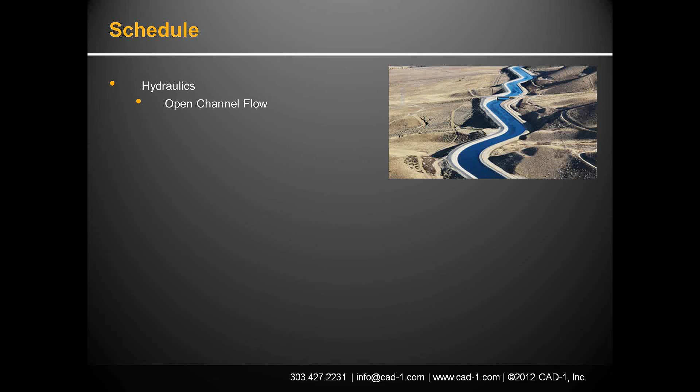So what hydraulics are we going to be talking about? We're going to talk about some open channel flow - so I've got a ditch, how do I know how much water is flowing through it? We're also going to get into creating stage and storage curves - so I've got a pond at this elevation, how much storage do I have in my pond? Another thing I'm going to show is how to take a channel and export it out to HEC-RAS. Now, I'm not going to actually do a HEC-RAS analysis, but I'll show you how to get your data out of Civil 3D and into HEC-RAS so you can start running these different types of analyses.

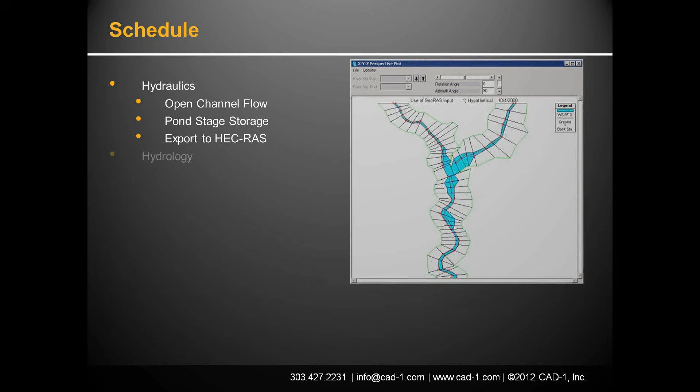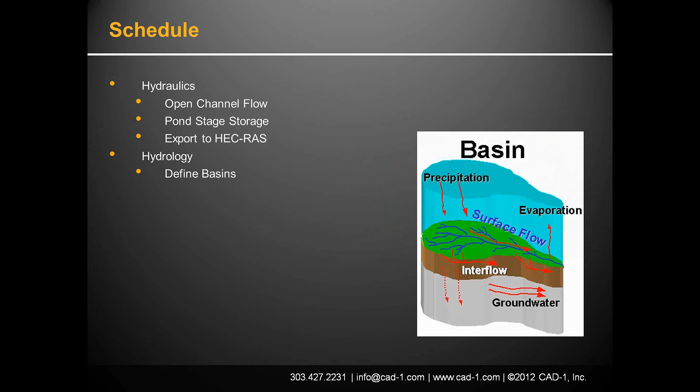Then we're going to get into the hydrology side of things. When we get into hydrology, I'm going to start talking about the basins - how do we define the different drainage basins we're going to be working with? We're going to use that to calculate the runoff, how much water from the rainfall actually ends up running off, and I'm going to route that through a pond. So we're going to create a pond and put some stormwater into it. Last, we're going to talk about some storm sewers - basically this puts it all together, so we've got a little bit of hydrology, a little bit of hydraulics going on in a storm sewer system.

Now, before I continue too much further, I've got some questions I want to ask you guys. First of all, what version of Civil 3D are you using? Are you current, are you up on 2013? Maybe you're a little bit older and running something older. Maybe you've never used Civil 3D and you're not really sure what it is.

These are always interesting to see. Yes, they are.

All right, looks good. I'm going to go ahead and close this and share the results here. Looks like most people are up and running in 2013, about half. That's kind of what I expected.

If you're not aware, the service pack for 2013 has been released. I know a lot of people wait for the service pack to come out before they move up to a newer version. I got a few people hanging on to that older version, and probably one person who has 2010 or earlier—give us a call.

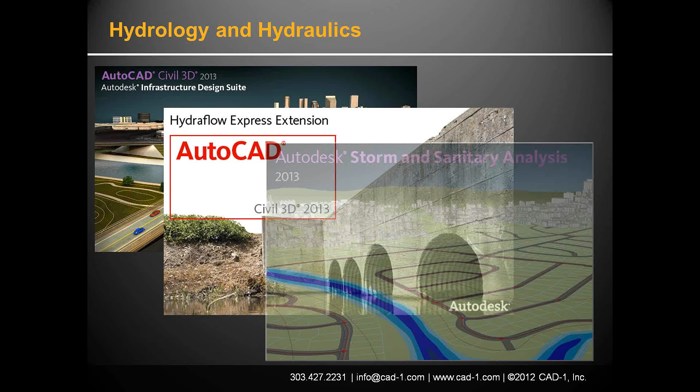So the Hydraflow Express is the Hydraflow stuff, the Intelisolve, and I'm going to be showing off some of that stuff. And last but not least, I'm going to show off the Autodesk Storm and Sanitary Analysis. This was part of the Boss International acquisition, and I'll be showing off a little bit of that as well.

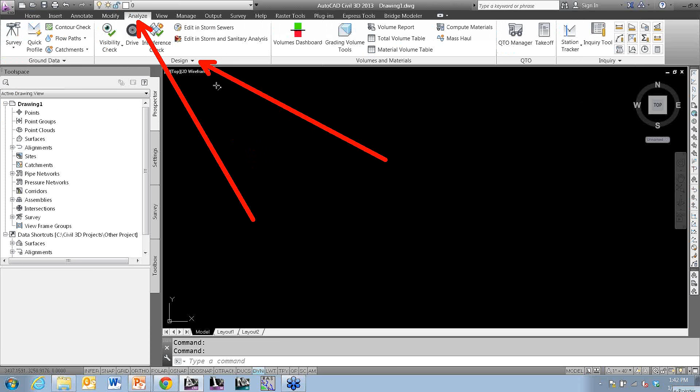Under my Analyze tab, if you expand out the Design panel, you'll see I have these 3 applications: Storm Sewers, Hydrographs, and Express. The one I'm going to be showing off today is Express. These 3 programs pretty much cover the functionality of those 4 programs from Haestad.

Storm Sewers will cover StormCAD. Hydrographs covers the functionality of PondPack. And Express covers FlowMaster as well as CulvertMaster.

So I'm going to go do an open channel analysis. I want to know what the depth of my flow is in this specific channel. So I'm going to launch Express, which actually launches as an external program.

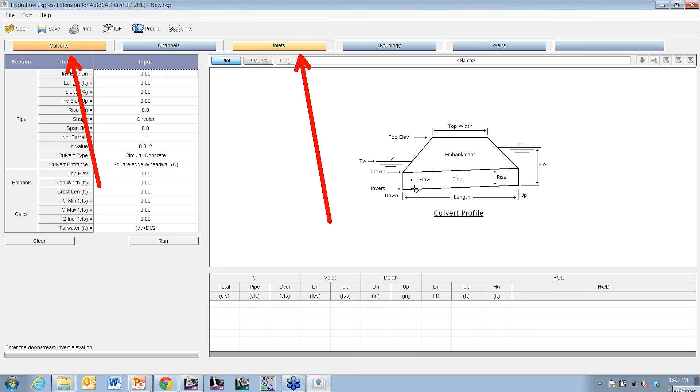And then I just come over here and I choose what it is I want to calculate. If you want to calculate a culvert, there's your culvert tab right there. You want to calculate an inlet or perhaps a weir. In this case, I'm going to do a channel.

So what kind of channel do I want? Well, I'm going to do a trapezoid. This is perhaps a drainage swale. And I just fill in the information that I have.

My section type is trapezoidal, my bottom width - how wide is the bottom of my ditch? I'm going to make it 2 feet wide. What are my side slopes? I'm going to set these at 1 to 1.

Chris asks, is there an orifice calculator? Let's see, I know sometimes things get a little... I lost it. I don't remember, honestly. We'll check into it. I believe it's under... no, it's not under weirs. Where is it? I thought there was one. Unfortunately, I don't think there is one, at least not here in this particular tool.

So my total depth, what is my allowable total depth for this particular channel? I'm going to say it's 3 feet deep. My invert elevation - it really doesn't matter what you put in here, you just have to put something in. Not exactly sure, but it doesn't like 0.

My slope - how steep is the channel? This is in percent, so I'm going to say it's at 0.4%. And then my n-value, it's a grass, so I'm going to say 0.02.

And then, how do you want to calculate this? I want to calculate the Q value versus the depth within the channel, and I want to do it in 10 increments. So I then run that.

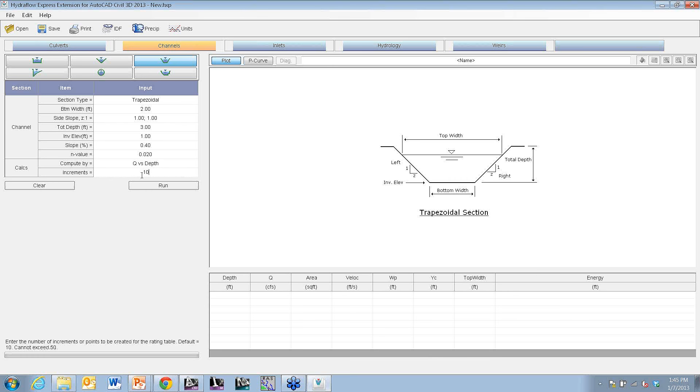Now down over here, it shows me basically the rating curve. So at a depth of 0.3 feet, I have 1.26 CFS. As I select these different settings, you'll notice that graph up top changes, showing me how full the channel is going to be. Completely full, this has a capacity of 89.5 CFS.

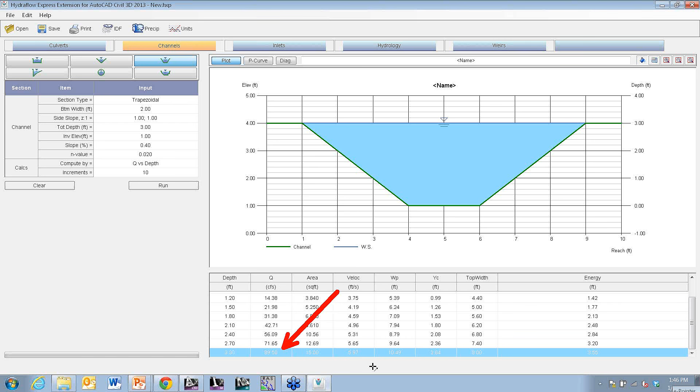So this is an example of how you can use this to do those quick calculations here.

And Harold has a question: how come there is no longer the interactive table of N values or the clickable selection of elevation/grade, etc., as there was under Land Desktop? Assuming you're referring to Land Desktop, I'm not sure what you're referring to. I was in Land Desktop, this is Civil 3D - things are different, perhaps? Yep, that's what he was referring to.

Yeah, it's just a different program. So this is what we're using now. Honestly, I never trusted the H&H stuff that came out of Land Desktop - I saw too many errors. But that's my personal opinion.

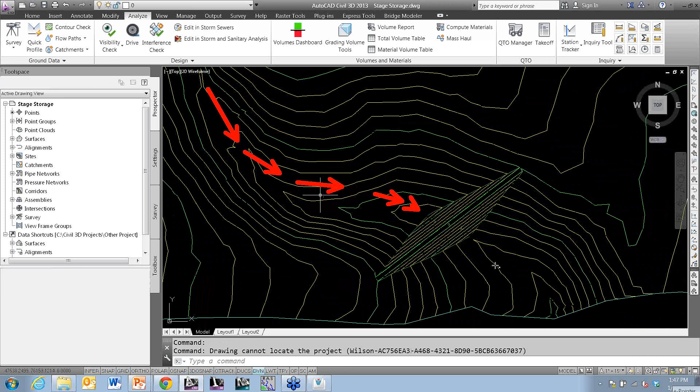Let me go ahead and open up a drawing here real quick. So in here I have a swale coming down through my project, flowing down this way, and then I decided I'm going to put in a berm across this draw, and use this for my detention. I want to know how much volume I'm going to have here, so I'm going to go run my stage storage calculation.

This is again going to be found underneath the Analyze tab - that's where I go to compute things. And under Design, the same place where I went to launch the Express, I'm going to run the stage storage curve tool.

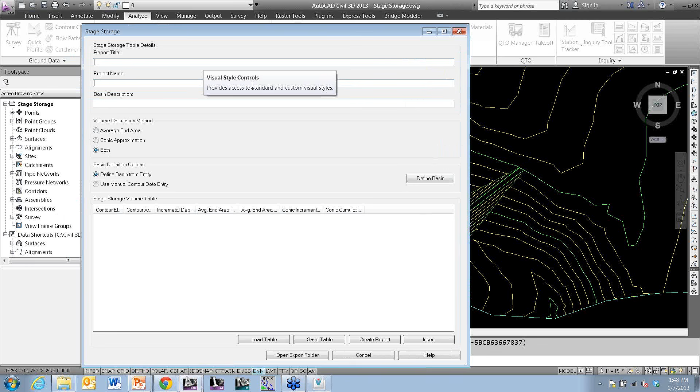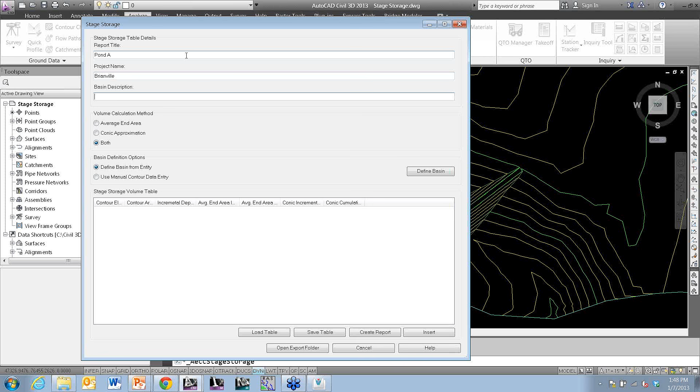Just walk your way through, give the report a title. Every once in a while you get the little things that stay up. So I'm going to give this report a title - I'll call this one Pond A, project name will be Brianville, and basin description... I don't know, description.

What method do you want to use to calculate the volumes? Do you want to use the average end area? Do you want to use the conic approximation, also known as prismoidal? Or do you want to use both options? In this case, I'm going to go ahead and do both just so we can see how they're different.

Then, do you have something in your drawing that you can use to define your basin? If you do, I'm going to use the define basin from entity. If you don't, you can simply use the manual contour data entry and then define the basin manually.

It'll ask you, okay, at this elevation, what's the area? At this elevation, what's the area? At this elevation, what's the area, etc. And you just go through and fill in the table. I don't have that in this case.

So I'm going to use the define basin from entity, and then I come over here and define the basin. It brings up my Define Basin from Entities dialog box. For my basin name, you can give it a name if you want, so I'll just call this basin name.

Do you want to define the basin from surface contours? Ooh, that sounds really tempting, doesn't it? Yeah, typically this is not one you're going to use. The reason is because this will grab every contour from your surface and use it for the stage storage analysis, and I don't want to use every contour - I just want to use just these few contours.

So I'm going to choose instead define basin from polylines, and extract the objects from the surface. If you're familiar with the object extraction routine within Civil 3D, that's basically what this is going to do. It's going to go extract the contours out, and then I'm going to go select them and say these are the polylines I want to use in my curve.

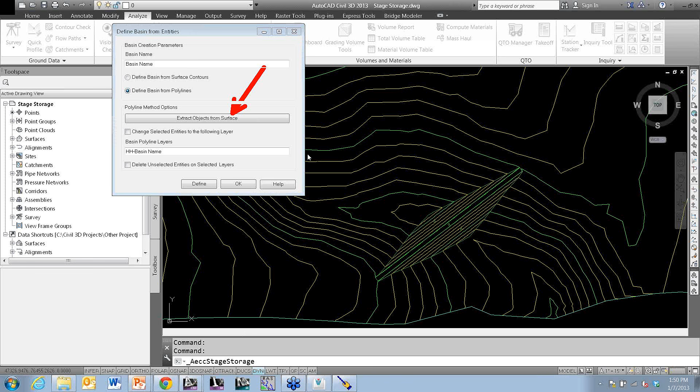So extract objects from the surface simply asks me which surface do you want to use, so I grab my surface. It went through and copied all those contours and made them into polylines basically.

I'm going to change those polylines that I select to a different layer, so it's going to put them on the HH-basin name layer - I can change this if I want. Then I define my pond, and I simply go through and select those polylines that I extracted out from the surface - those are the contours I want to use for my basin. And it fills in the table for me.

A couple different things I can do with this table - I can create a report from the table. So I choose Create Report, and it's basically going to save it as a TXT file. I'll call this Pond Stage Storage, and it creates a report for me. I can then take this text file and import it into Excel and do anything that I want with it.

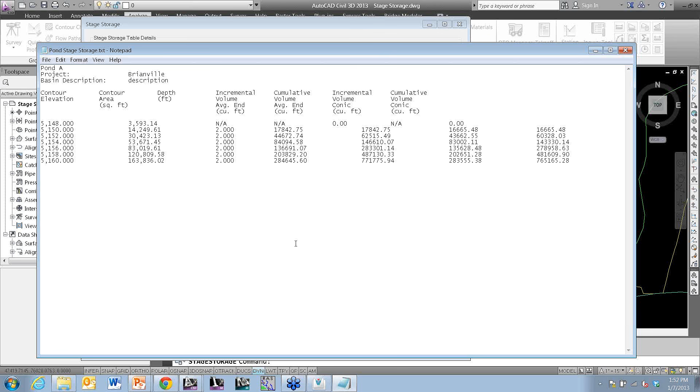Another thing I can do is insert this into my drawing as a table. I'll choose Insert and pick a point in my drawing, and there's my table. Now, one thing to note, this is a static table. It's in fact just an AutoCAD table, so if the surface changes, if those polylines change, you'll need to run through the process again.

You might want to watch our linking data to Civil 3D webinar from about a month ago if you want to know more about that. All right, so there's my table, and as you can see, it gives me the totals for both the conic approximation as well as the average end area.

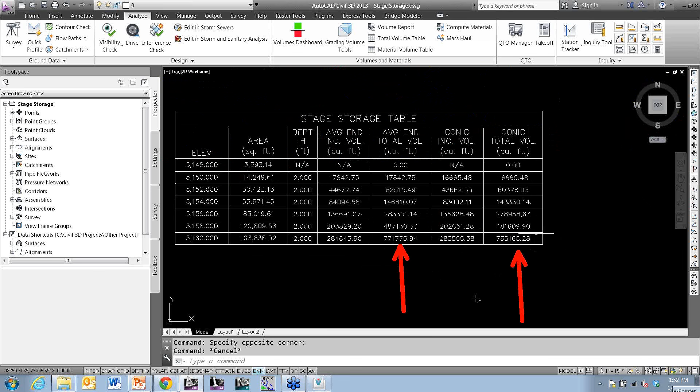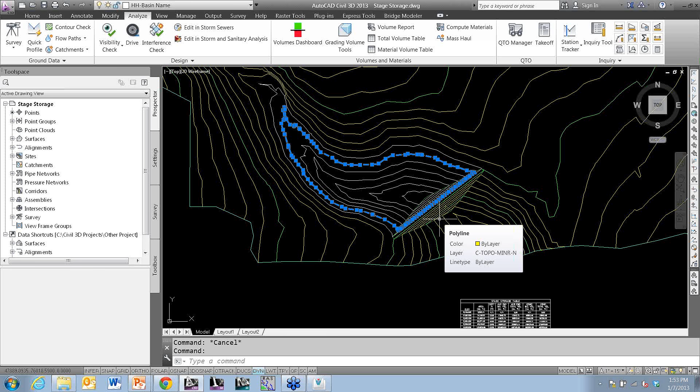Jake asks, those were polylines and not surface topo lines, right? So what this did, Jake, is it took those contours from the surface and created polylines from them, and then ran the routine on those polylines. So it's a little bit of both. And like I said, if you change something, you'll have to go through and run the routine again. Jake says, awesome.

Now one thing this does, if you notice, I now have these white polylines in here. So when I ran the routine, I told it I want you to put these objects on a different layer. There was also an option to erase all the unselected polylines, so this extracted all of the objects. You'll notice I now have polylines that represent all of my contours throughout the entire surface.

There is an option to say delete these, but for whatever reason it doesn't work. That's why I didn't bother to toggle it on, but it's not that big of a deal.

You grab one major, one minor contour polyline here. Because I put these on a different layer, I can just right-click, select Similar, which grabs them all except for those ones I converted, and then I just erase it. So it's not the end of the world, it's just something I'd like people to be aware of. Now you can see there are no polylines there any longer.

All right, so that was the stage storage tool.

Let's talk about exporting out to HEC-RAS now. So quick show of hands up there on your little GoToMeeting, how many people here have used HEC-RAS? Just one, kind of curious.

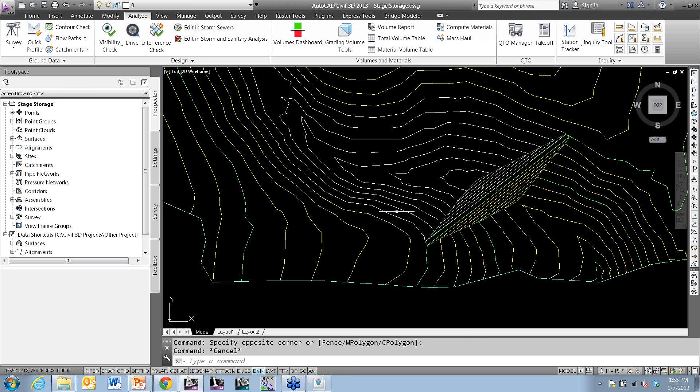So HEC-RAS, let me go ahead and close out of this drawing here. Actually, let me just go open a different drawing.

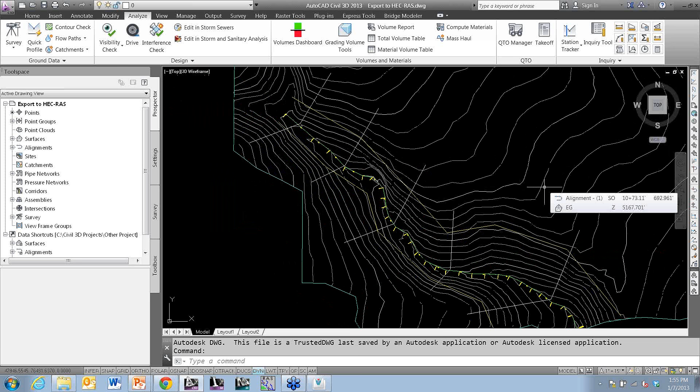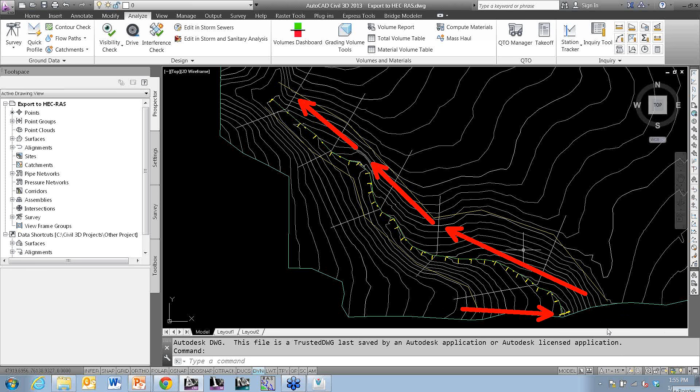So I've got basically the same scenario going on here, same little area. I've got this draw running through my project, and instead of putting in a pond here, I just want to do a HEC-RAS analysis through here. I have an alignment that's running along the flow line. Now this alignment currently has the station starting down at the bottom and working its way up, so station 0 is down here, station 100 is towards the upstream end.

I also have a series of polylines in here. If you notice these white polylines, these are the sections that I want to use in HEC-RAS. So I need to be able to get this information out. The other thing that I have is a couple of polylines here, and these represent the left and the right overbanks. So as I'm creating the sections within HEC-RAS, I want these to be used for the overbanks.

So under the Output tab, I'm trying to create something outside of Civil 3D. I'm going to export to HEC-RAS.

Well, actually, sorry, I totally skipped an entire section. I've got to create the sections first. Sorry, I got a little distracted there for a second. Hailey likes to mess with your head.

First thing I need to do is create the sections. So I have the alignments, I have the polylines, I need to create the sections. These in Civil 3D are referred to as sample lines. Before you can create a sample line, you have to have an alignment.

I'm going to go create my sample lines. I'm going to select the alignment that I want to use to create my sample lines. Then, what data do you want to sample? You're going to sample that surface that you want to get your cross-sections out of. In my case, I only have the one surface, so I'm just going to leave everything as it was. But if I had a couple of different design surfaces and existing ground surfaces, I'd simply toggle on the one surface that I want to use here.

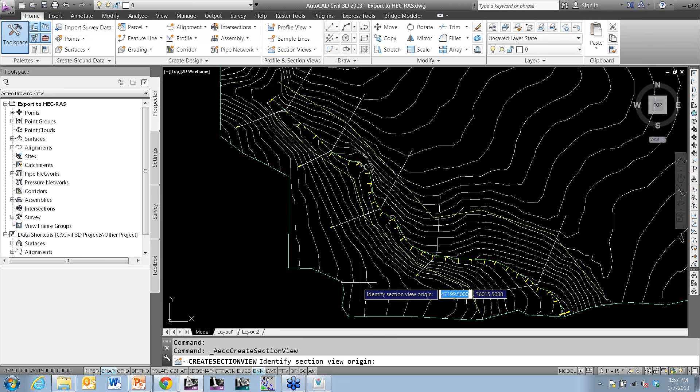I'm done grabbing them, so it made them into sections for me, into sample lines rather. So it created the cross-section for me within Civil 3D. If I want to, I can go create a section view, and I'll just create a single section view here, just to see what that section looks like. So this is what my section looks like at one of those stations.

Now that I've got the section created within Civil 3D, I use the tool to create a file that we can then import into HEC-RAS. And that's under the Output tab, Export to HEC-RAS.

Which surface do I want to export? Which site? This is just so you can select the correct alignment. And then which alignment do you want to use? For that alignment, which sample line group do you want to use? In this case, I only have one alignment, one surface, one sample line group, so it's really easy to do.

I'll give this a name. The river is going to be the Little Mississippi. I don't know, I'm just making something up here.

And if I want to, I've got those polylines in there, I can use those river overbanks. So I'll toggle that on. Which object do I want to use for the left side? I choose left, and then I pick the polyline that's on the left side. Do the same thing for the right, and I'll select the object that's on the right side.

Now, in previous versions, you had to have these as alignments. In this version, it's actually going to make them into alignments for you. I then export this. Don't just hit OK - if you hit OK, it closes the dialog box, it doesn't actually do anything. So I have to hit export.

It's going to ask where do you want to save it, so I'll call this one H and H demo. It's going to save it as a GEO file. Save that, and now I have the GEO file. And now I can hit OK.

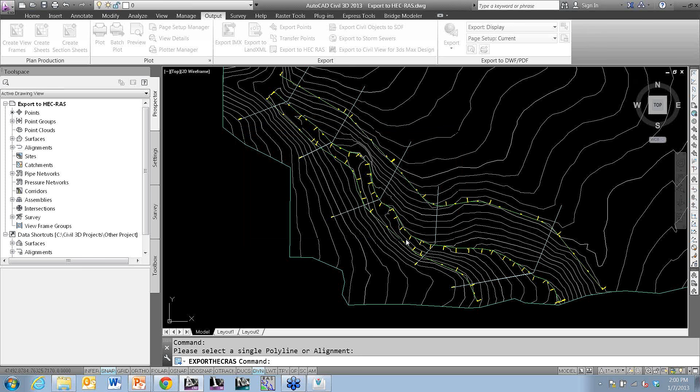And as you can see, it took those polylines and made them into alignments. If you don't like them as alignments, you can always undo that and put them back to being polylines. Now let me go ahead and run HEC-RAS.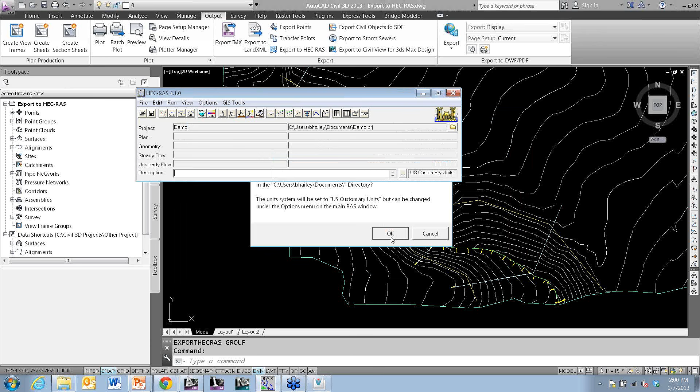So now here in HECRAS, I'm going to go create a new project. I'll give it a name - I'll call it Demo for the lack of originality on my part. And I'm going to go to the geometry editor, so I'll go to Edit, Enter Geometric Data here. And I want to import those sections into HECRAS.

So I'm going to come down here under the File option, Import Geometry Data, and I'm going to use the GIS format, since that GEO file is considered a GIS format within HECRAS. And I simply browse to that data. So I'm going to have to go browse to it here. Got to be here somewhere.

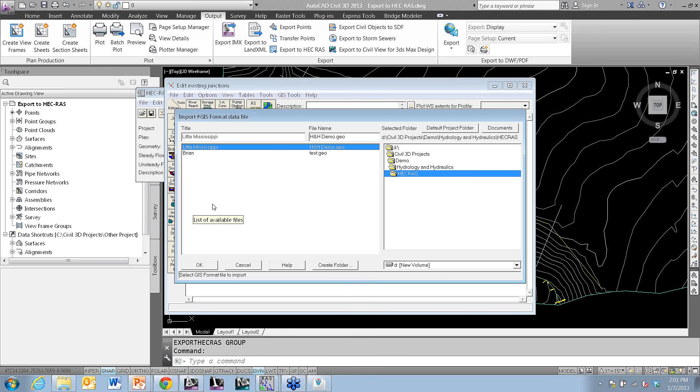So here's the Little Mississippi. Walk your way through the process, right? It's imperial data - is it customary unit, U.S. units? Is it imperial or metric units? All right, I got some options in here, it shows me everything that's going to import.

I finished the imported data, and there is my river showing here. Now, something's wrong - it's going the wrong direction. Typically, when we're doing these sorts of things, we start down at the bottom end, and we station upstream. That's the direction the alignment's going, but that's not the direction I want the flow to go. I want the flow to go the other direction.

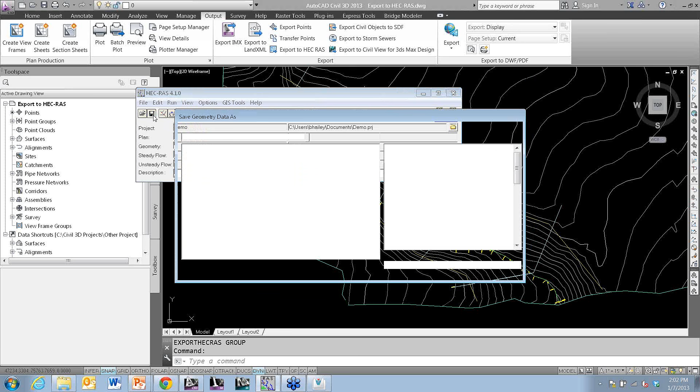So here under the Geometric Data Editor, I'm going to choose GIS Tools, and I had this issue earlier - should be able to do the reach invert table. So let me try saving this real quick. There it is. I don't know why it just needed a little kick in the pants.

I'm going to go to the Reach Invert Lines table, and I'm going to flip the coordinate order. Yes, I want to do that. And now you can see the river is going, or the stream, or the reach, or whatever it is, going the direction that I intended it to go. So this is how we can take that Civil 3D stuff and bring it into HECRAS.

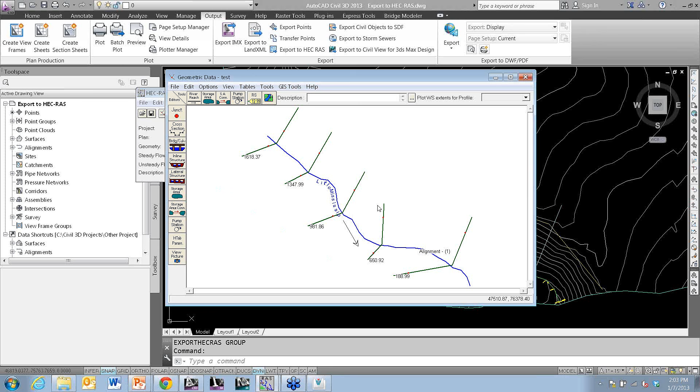All right, so let's talk basins now. We're done with hydraulics for now. We're going to move on to some of the hydrology stuff. I want to go in and calculate a drainage basin.

So I'm done with HECRAS. I'll go ahead and close out of HECRAS, and I'll go open up another drawing here.

So here I have a subdivision I've been working in. I've got all the grading done for it. I'm going to pretend it's done, and this isn't really what it's going to look like, but I'm going to pretend this is what I want it to be. I'm going to come in here and start defining drainage basins to these inlets, using these two inlets as an example. So what area is contributory to this inlet, and what area is contributory to this inlet?

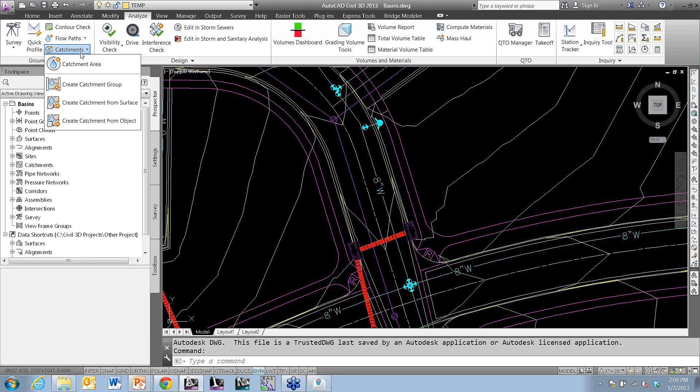Under my Analyze tab, again, this is where I go to compute things - catchments. I'm going to create a catchment from surface. Now, if you don't have a very well-defined surface, this tool doesn't work very well. But if you've gone through and modeled your surface fairly accurately, this is a really nice tool. So I'm going to create a catchment from a surface and specify the discharge point - I'm going to choose the middle of this inlet here.

All right, what are we going to name this? I'm going to name this one Catchment 1. That's fine, you can go through and rename them. It's going to put them in a catchment group. Which surface do you want to use? I'm going to use this composite surface, the reference pipe network structure.

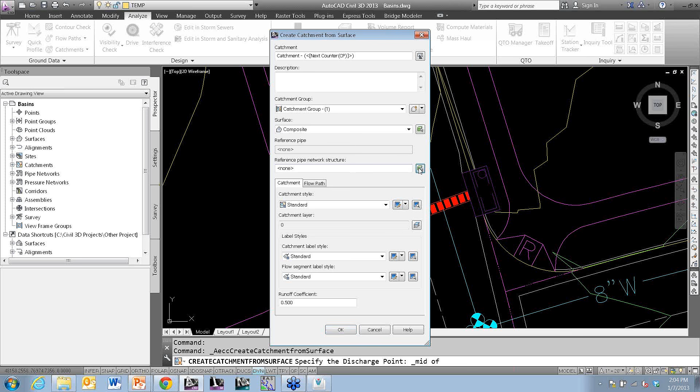So where does it drain to? Does it drain to an inlet? If it does, I can go ahead and select that inlet in the drawing. So I want that catchment to connect to this inlet - in this case, it's inlet F1. I can change the layer it goes onto, the styles, select OK, and it creates the catchment for me.

Let me go ahead and repeat the process here for this one, and then I'll show you what it did. So I want that one to drain to this inlet. And so I now have two catchments - this is the area that's going to drain to this inlet.

Why isn't this area in here contributory to it? Well, it's going to flow down here, hit this street, and flow down to this low point down here. So it's not contributory to these inlets.

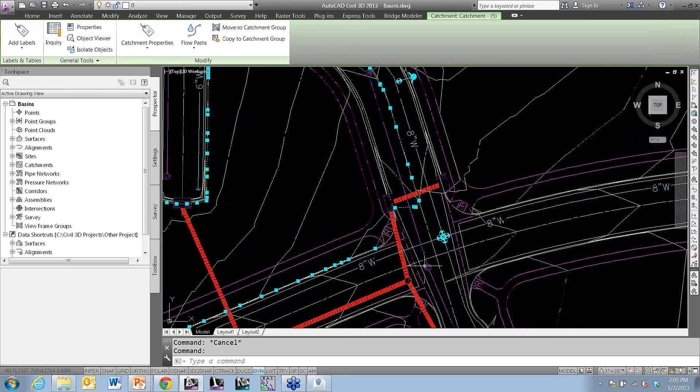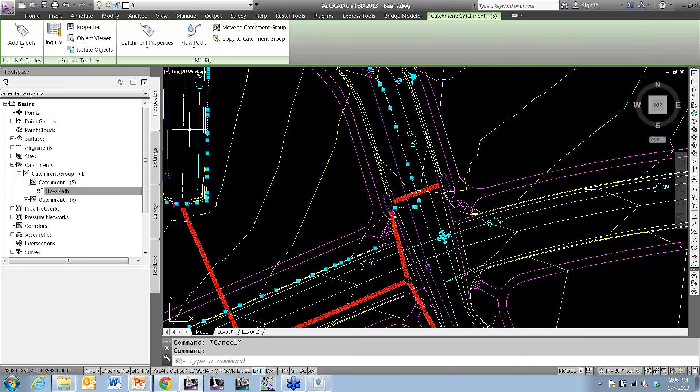Under my prospector, you'll see I have catchments - catchment 5 and catchment 6. And they have a flow path. It's kind of hard to see, but right along the flow line of my curb and gutter, you'll see the flow path, and again, that's following along the surface.

If you edit the flow path segments, the only way that I know to get to this is to actually do it through the prospector - choose Edit Flow Path Segments. You can actually come in here and start doing things like putting in the different flow regions, so I can add in additional regions.

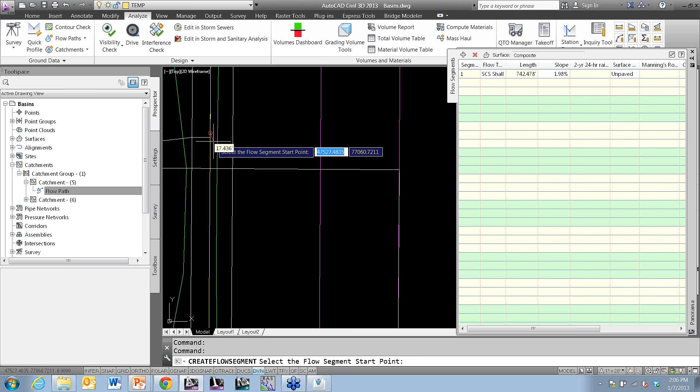So I hit the little plus there, and let me go ahead and shrink this up a little bit. So I've got one region - as you can see, this is where the flow is. Now I want to go to about there, and then that's my shallow concentrated flow.

If I wanted to, I could do another flow path - maybe I'm going from overland flow to shallow concentrated flow to channelized flow. I can start putting those different things in here. Based off the SCS, I've got 3 different types of flows. So if you're doing a time of concentration using the SCS method, here's where you can set those different regions for this.

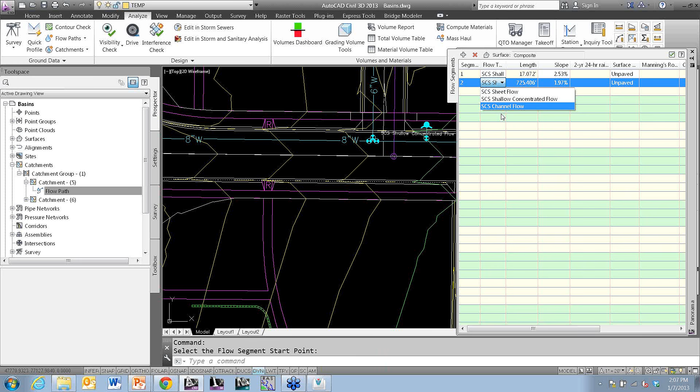And I just continue to do all the rest of everything in here, and I'm good to go. So I've defined my basins. Well, now I need to know how much water is coming off this stuff.

So I'm going to take all this information into a program called Autodesk Storm and Sanitary Analysis. Now let me go ahead and save this drawing here real quick. I'm going to take this into SSA, Storm and Sanitary Analysis. I've got a tool button right up here that allows me to edit this in Storm and Sanitary Analysis.

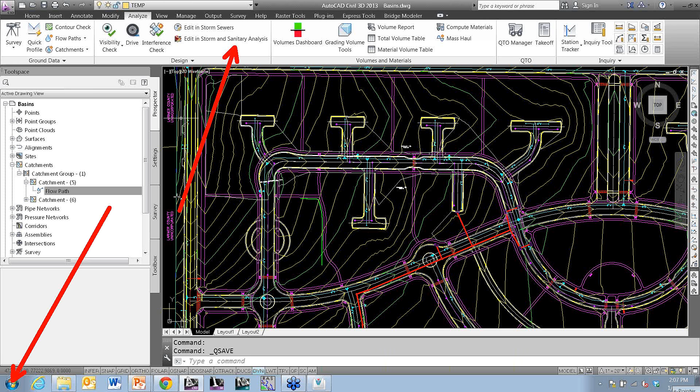When you install Civil 3D, it also comes in through your Windows Start button, so you can also access it through there. But I'm just going to choose Edit in Storm and Sanitary Analysis. The reason I like to do this is because it's actually going to take all of the pipe networks that I have in this drawing and bring them into Storm and Sanitary Analysis as well. So I'm not interested in the sanitary sewer right now - I'll uncheck that.

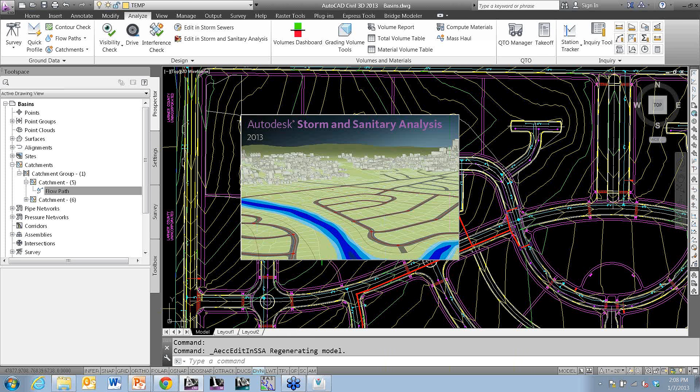Select OK. It's going to open up SSA and take my pipe networks from this drawing and bring them into SSA. I'm going to create a new project here. It's also going to take those basins and bring them into SSA, and it's going to attach the basins to the appropriate inlets. It's also going to take the drawing I was in and bring it in as a background image.

Do you want to save the log file? It's just showing me what it is I did, so I'm not really interested in the log file right now. In fact, I'll go ahead and close out the log file. And there's my project.

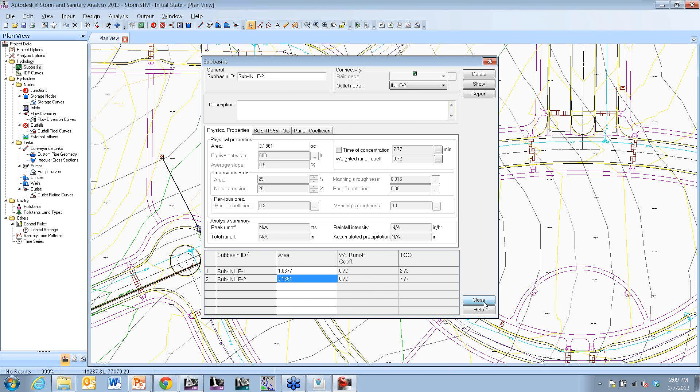Jake asks, can I create a catchment without a pipe network? That's a good question. In Civil 3D, yes, you can. But when you bring it into Storm and Sanitary Analysis, it needs to be associated with a pipe in order for it to transfer. At least I'm pretty sure it does.

Let me try that, you got me thinking here. Let's find out. I've always been told, don't try anything you haven't tried, don't show anybody anything. Nah, okay, whatever.

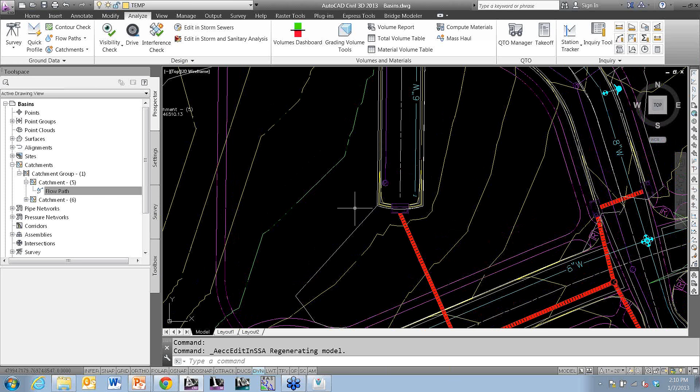So let's see, I want to do this inlet here. You got him thinking, and that's a rare thing to do. So I can just draw a polyline, say hey, I want this to represent this area here. I'm just being really quick and dirty right now. And then I'm going to draw another polyline that represents the flow path, so this is where the water is going to flow. That's all I did: a closed polyline for the area, a single polyline to represent the flow path.

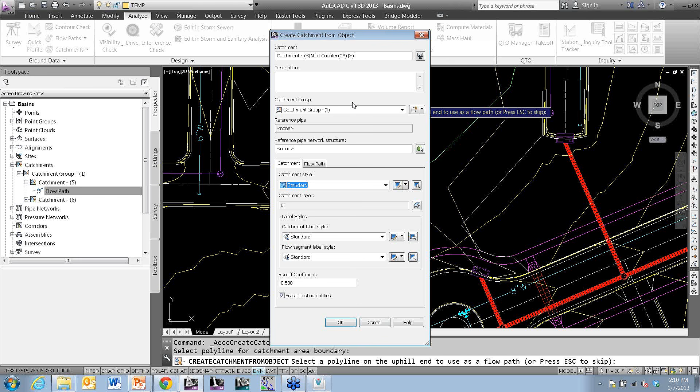Under my catchments, I can then create a catchment from objects. So I know you can create catchments in Civil 3D without a pipe network. Now it's going to ask me to select the polyline for the catchment boundary, and then select a polyline on the uphill end to use as a flow path. And now it's going to allow me to create my catchment. If this is referencing a pipe network, I can simply select that there. In this case, I'm not going to do that just to see what it does. Select OK, and now I have my catchment.

So let's see what happens when I take this into SSA now. If I remember correctly, this one will not come through, but we'll give it a try. So I'm going to do exactly the same thing I did before. All right, I'm going to create a new project.

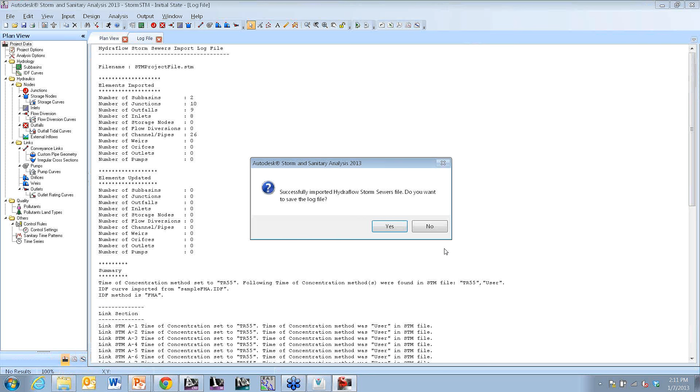And yep, these two basins did come in, but there is no basin down in this area. If I go double click on one of these sub-basins, you can see there's only two sub-basins down here. So in order for the sub-basin to go from Civil 3D into SSA, it has to be associated with a pipe structure of some sort. You can always associate it with a manhole or something like that, and then once you get into SSA, you can always tell it to go someplace else.

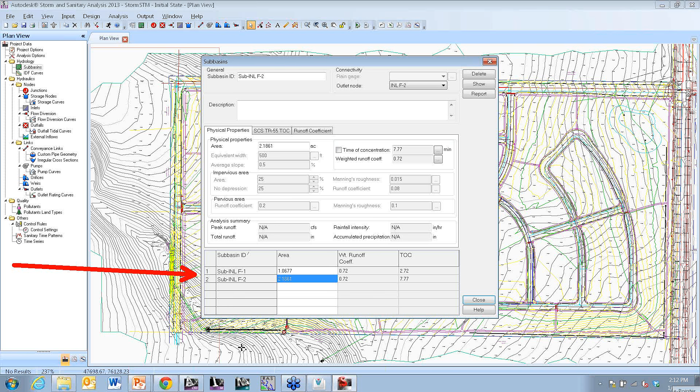So that's kind of what Brian had a couple questions here. I'll do it in reverse order. Can you just add a fake inlet? Absolutely, that's kind of what I was saying to do, have it attached to something, yep. And then once you're here in SSA, I can simply grab this and tell it to connect to something else.

And then Brian's other question was, what methods are available for peak runoff? Ooh, that's a good question. I'll get to that one in just a moment.

All right, so here we are in SSA, and I want to start doing some analysis. Now, just to make life a little bit easier for me, I'm going to get rid of some of these elements. I had more things on this storm sewer than I really need or want to deal with in this particular example. So I'm just going to come through here and get rid of some of these inlets.

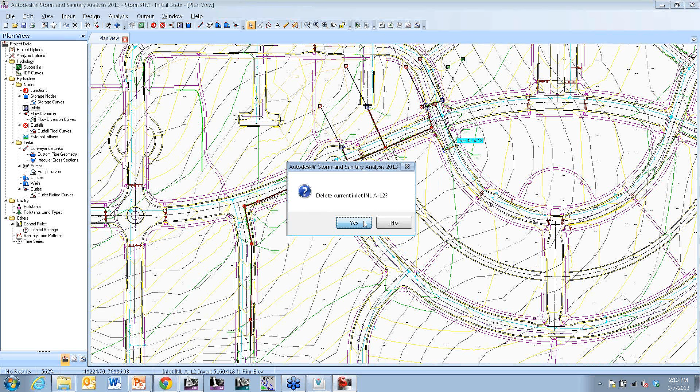Now, each inlet also has an outfall. If you'll notice these red X's here, that's for the overflow of the inlet. So if the inlet's on grade, where's the water going to go that bypasses it? So I'm going to go ahead and get rid of those as well.

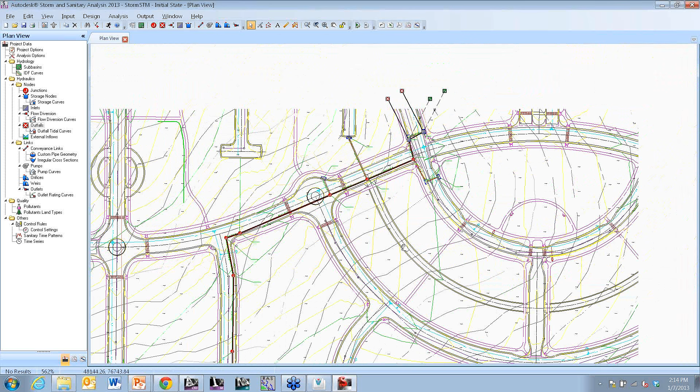The only reason I'm doing this is just so I don't have to input as much data to get some results out of here. And I'll do the same thing down here. So again, this particular one has 2 inlets and a long pipe coming to an outfall, and really that's all that's in this one.

Before I get going, I really need to set the project up. So I'm going to come over to the project options, double click, and this is where I go through and set everything. This will answer your question here, Brian. My unit system is US units, my flow units are CFS, and then my hydrology methods.

What method do I want to use to calculate my peak runoff? I've got all these different methods, but really, of these, the only one I've ever used is the rational method.

Link routing method. If you're going to run into a situation where you might have backflow, flow looping in on itself, something like that, you need to make sure this is set to hydrodynamic. Kinematic wave will only go, it's a linear approach. I don't have any of that, so I'm going to leave it set to kinematic wave.

And I can change my labels, my prototypes. So when I create a pipe, what's it going to be? It's going to be a circular pipe. So those are the defaults, basically.

And while you're thinking about this, because this question may tie right in there, Brian also asks, is there urban drainage time of concentration? Urban drainage time of concentration, well, let's take a look at the different types of time of concentration we can do.

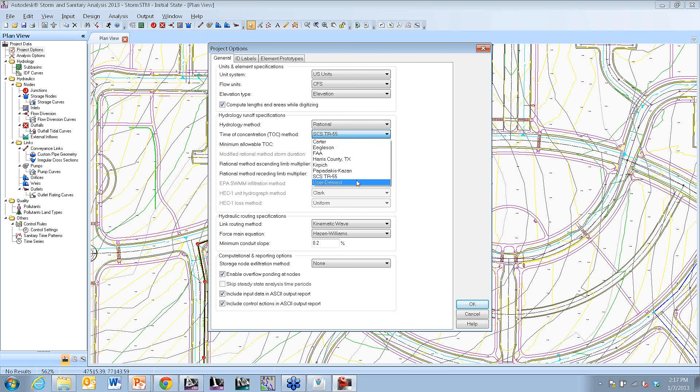So, I'm sorry, not under analysis, project options. My time of concentration method, these are the different time of concentration methods that we have. If you don't have one in here that will work for whatever jurisdiction you're in, you can always do a user-defined time of concentration. So you use the urban drainage methodology to calculate your time of concentration, and then you can manually input it in here. But these are the only options that we have currently.

Now, this particular pipe network was kind of originally designed to have a whole bunch of extra inlets coming in here. So what I'm going to do, just to make things a little bit more interesting, is bump up the areas here. Instead of having an area of 1 acre, I'm going to make this one 30 acres, and this other one 15 acres, just so we can get some actual water flowing through here.

Once I've got my system set up, I can run the analysis. Yeah, it's the little icon of the guy running. Get it? All right, so I run the analysis. Those Autodesk people.

And as you can see, I've got some situations here, I've got some issues here. I've got this big blue dot, and a big blue dot with a red line up here. What is going on here? I got another big blue dot down here in this road. Well, let's go find out.

I'm going to go create a profile and see what's going on. I'm going to right-click on the node that I want to start my profile at, and start a profile plot from this location. By the way, if you're ever driving through your neighborhood and you notice a big blue dot on the street...

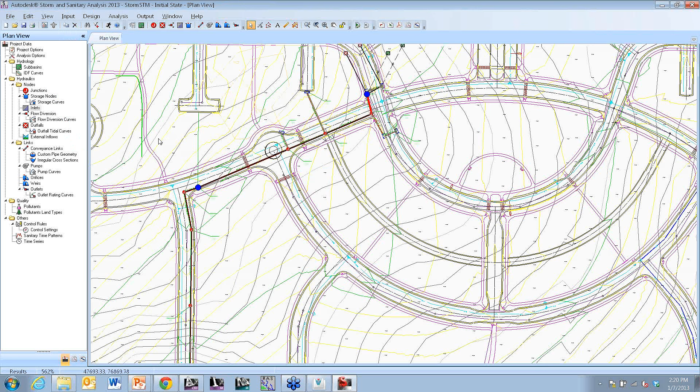So during the 100-year storm, this one's over capacity or under capacity. But what if I do just a 2-year storm? So I'll go back to my analysis options, and I'll change my storm to a 2-year storm, maybe a 10-year storm.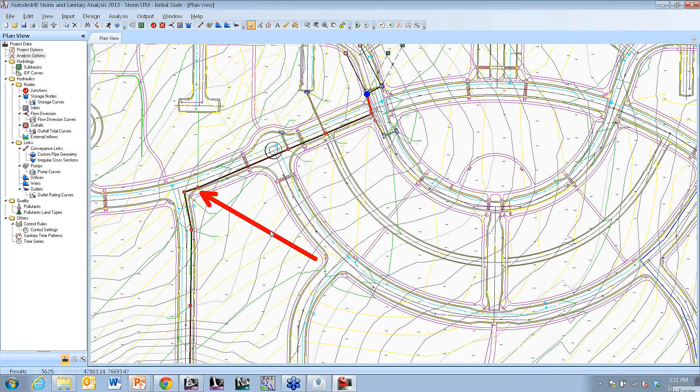Run the analysis again. And you can see one of the blue dots went away. Go ahead and create my plot again.

So I start my profile plot down here at the end, come all the way up to the top, and I'll select that very last one. Oops, I didn't need to right click. Just left click on it. It selects everything between, and I'll show the plot.

So I still got some issues here with this project, but not as many as I had during the 100-year storm. So I know I need to come through here, change some inverts, perhaps, change the sizes of my pipes, those types of things.

Oh, by the way, if you're done with the profile and you want to get out of this, do not hit this button up here. That will close the program for you. I've done that so many times. Now I'm just going to close the profile plot.

So I need to put a pond down here. I already put in that berm across this drainage way here, and I want this to start ponding up back in this area. So I'm going to simply put in a storage unit. I want to put in a pond.

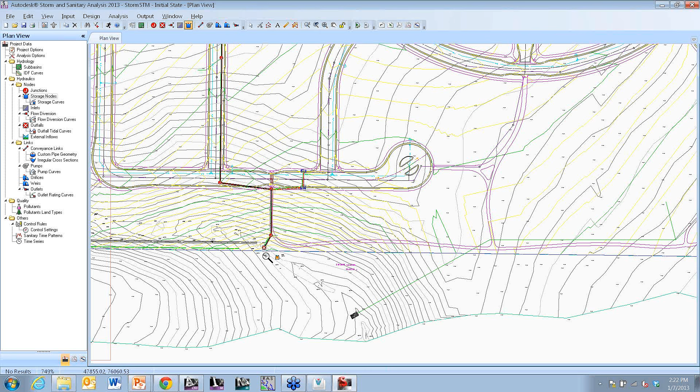And I'm just going to have it display right there. So this pipe is going to discharge directly into the pond. Well, I want this pipe to be analyzed, so I could put the pond at the end there, but basically what I'm going to do is I'm going to take this outlet and convert it to something else.

I don't want it to be an outlet anymore. I'm going to convert it to a junction. Bear with me for a minute here. So it's now a junction, and then I'm going to connect this junction with the pond.

Now the pond is huge, it's not a pinpoint location. So what I'm going to do is use a conveyance element, and I'm going to connect the end of this pipe with my pond.

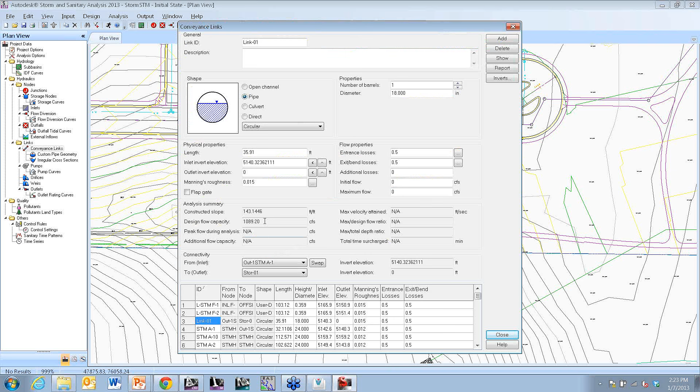Now this pipe really should have no hydraulic function whatsoever. It's just a connector, just a mathematical connector here. So I double click on it, and I'm going to convert this to a direct connection. I don't want it to be a pipe or an open channel or anything like that. I want it to be a direct connection. So there's going to be no hydraulic routing or anything through this.

Now my pond itself, well, I simply come through here and I set up my pond.

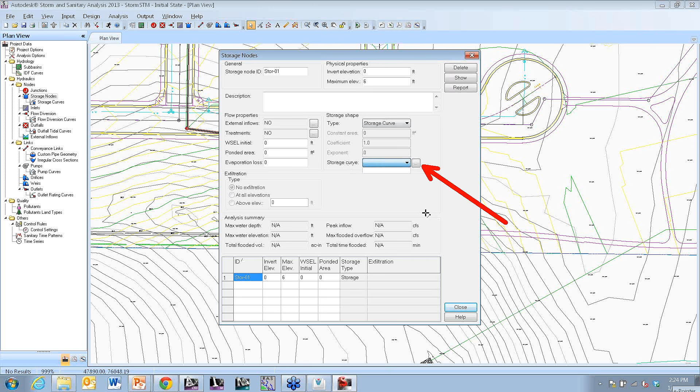What type of pond is it? How do I want to define the pond? Is it functional, so I can put in a mathematical expression to define this? Well, I don't have that. I have a storage curve. Remember back in Civil 3D I calculated that storage curve, so that's what I'm going to use here. I don't have a curve listed here yet, so I need to go create a curve within SSA.

I'm going to add a curve. I'm going to call this one pond, and this is going to be depth versus area. So back in Civil 3D...

I've calculated this table, and I'm simply going to take these values and put them into that table. Just to make my life a little easier, I'm going to drag it off onto my second monitor—I know you guys can't see it over there, but I can. Now back in SSA, I'm simply going to come in here and type in the depth.

So at an elevation depth of 0, I have an area of 0. Now this is a really big pond, and I have just a little bit of flow, so I'm going to truncate things a little bit. So at 2 feet deep, it's going to have an area of 36 square feet. That stage storage calculation we did actually ended up with 3,600 square feet.

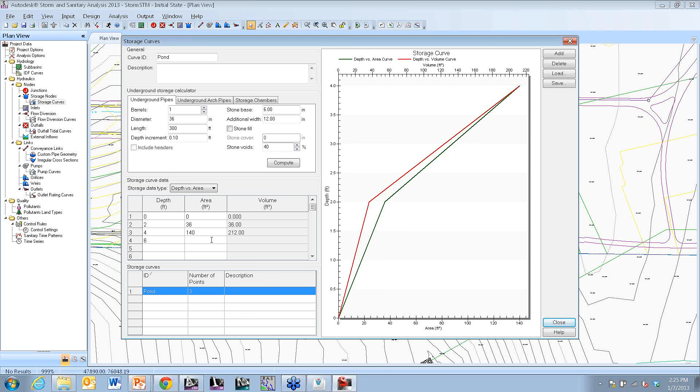Just to make things more interesting, I'm going to divide them all by 100. So at 4 feet, I have an area of 140. At 6 feet, you just go through here and type this in—I have 304. At 8 feet, I have 537, and at 10 feet, I have 830. As you can see, my storage table over here on the right is that stage storage curve we calculated back in Civil 3D.

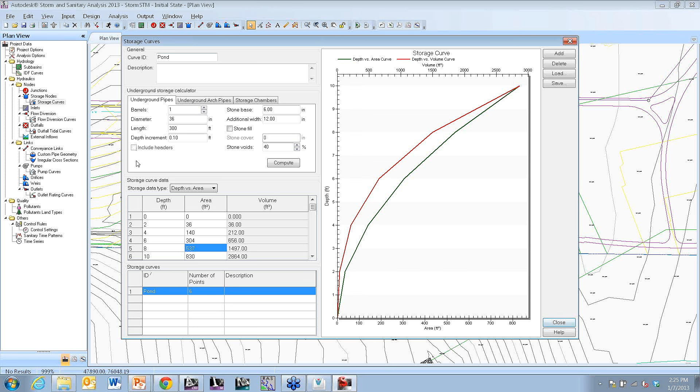And now I have my pond created. This is the depth of the pond. My invert elevation—based off the contours that I have, my low elevation is going to be 5146. My max elevation, well it's going to be, I don't know, 10 feet—I'm sorry, it's not depth, it's elevation, so it's going to be 5156. My initial water surface elevation, set at 5146 to be the same. I'll go ahead and close that. So I've now created the pond.

Great, now the pond's going to fill up. Where's the water going to go? Well, I'm going to have two different outlets on this: a pipe coming out of it, and also an overflow weir. You can continue to add additional pieces. I have an orifice for my water quality, an orifice for my 10-year, an orifice for my 100-year, and then an overflow for a weir, a broad-crested weir for anything beyond that.

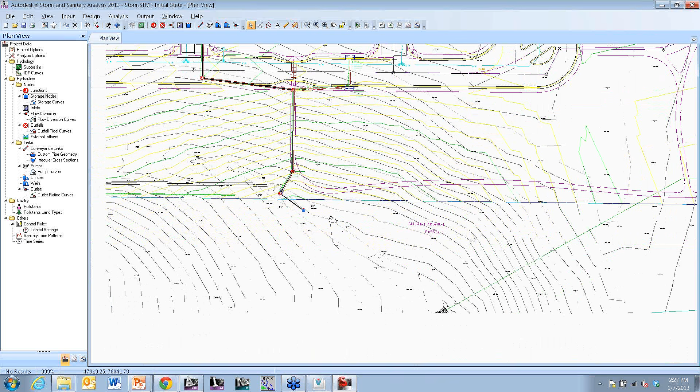So I'm going to come in here and put an outlet, an outfall, rather, down here. Now I'm going to connect the pond to the outfall using a weir—an orifice, rather. So this is going to be my control orifice. I'm going to go from this pond. Now this is just a graphical thing—I'm going to come up here so I can differentiate it from any other pieces coming out of here.

I double-click on that to go in and change the values. So what size orifice is this? Well, I'm going to start off with a 4-inch orifice, and it's got a crest elevation of 5146, so at the very bottom of the pond is where it's going to start coming out.

I'm also going to put in an overflow weir, so I add in a weir. Do the same thing, go from my pond, and again I'm just going to put this jog in here so they don't overlap each other. And I put in the values for the weir: my crest elevation is going to crest at 5156, the length is going to be, I don't know, 6 feet wide, it's going to be 2 feet deep, and it's going to have 1-to-1 side slopes. You just fill in the information that you have.

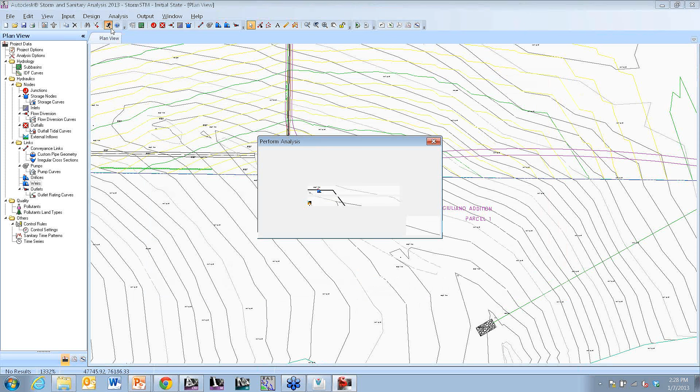I then run the analysis one final time. And if I go into my pond now, it's going to show me, under the report, all sorts of information. Actually, it shows it to me down here as well. So there's my maximum water elevation, 5155.84. The peak flow in, 13.85. The maximum depth, all sorts of fun things here.

All right, that report opens up in Excel, so I've got this—I can do whatever I need to with this, print it out, put it in a report. And I can do the same thing for my weir. All right, so my peak flow for my weir is 0 CFS. I never actually reached the weir. Peak flow for the orifice, 1.34 CFS.

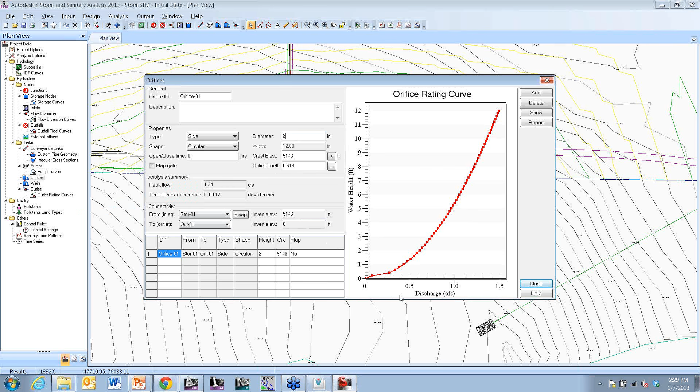So what happens if I make this orifice diameter a little bit smaller? I'll make this a 2-inch. Rerun the analysis.

Now my weir, you see I messed something up. I can tell that because of the little blue dot there. Maybe I put my weir elevations above the top of the pond or something along those lines. But I can simply change that value and everything changes.

So great, I've gone through here, I've run this analysis. I can then take this and export it as a Hydraflow Storm Sewers file. Now, because I added in some non-storm sewer stuff, this isn't really going to work all that well, but if I was just doing storm sewer, I can export this as a storm sewers file. It's going to save it as an STM file.

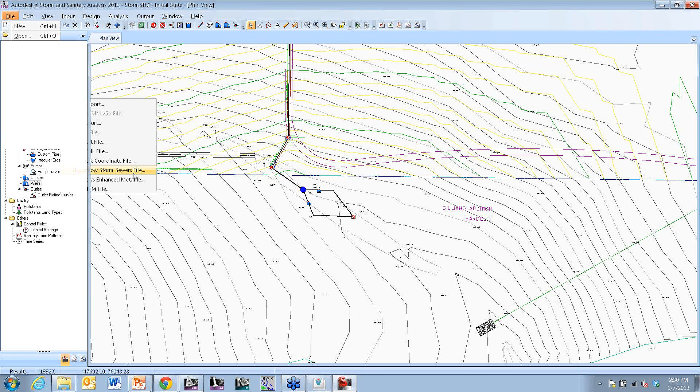And then back in Civil 3D, I'm just going to kind of talk about this, I'm not actually going to do it in this case. Under the Insert tab, I can import a storm sewers file. And when I import this in, it's going to detect, hey, you already have a pipe network in here. What do you want to do? Do you want to create a new pipe network, or do you want to update this one?

And if I choose to update it, when I bring it in, it's actually going to bring in the hydraulic grade line, energy grade line information as well, which in this case I don't have. And then I can display that in a profile if I want to.

So we got a question from Brian here, goes back about 10 minutes. Can the HGL and EGL be added to each pipe so it can be shown in the profile within Civil 3D? Yeah, and actually I just answered that one. Here's the hydraulic grade lines.

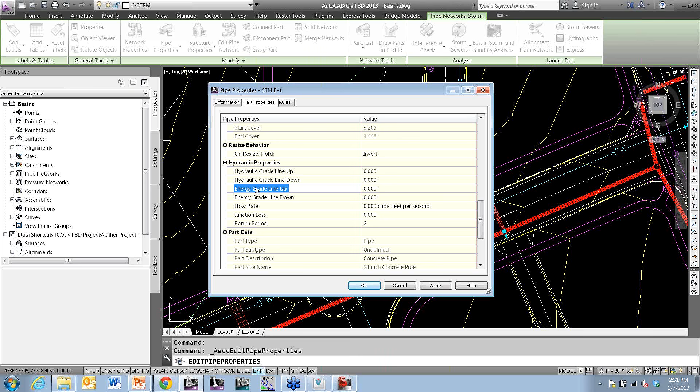And then when you're working, if you want to see those hydraulic grade lines within the profile, that's a property of the style of the pipe. So I'm going to edit the pipe style here. Under display, I change my view direction to profile. I can tell it, do you want to display the hydraulic grade line and the energy grade line?

And Chad asks, can you have the HGL for multiple storms in Civil 3D? Multiple storms, hydraulic grade lines, energy grade lines, no, you cannot. A pipe can only have one energy grade line and one hydraulic grade line within Civil 3D. So unfortunately, you can't show the 100-year and the 10-year, or the 100-year and the 2-year, or anything like that. Not with a single pipe within Civil 3D.

Be nice if you could. That would be. Perhaps in 2014, or whatever they're going to call the next version. We can't talk about futures, so I said perhaps. I honestly don't know. Now we have to do that safe harbor thing. Things we say here may not be really true. Yeah, maybe a bunch of baloney, I'm making that up.